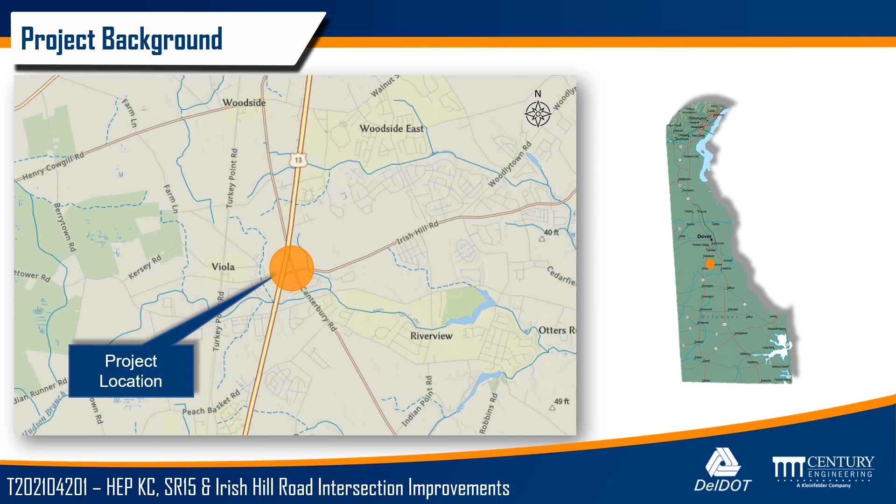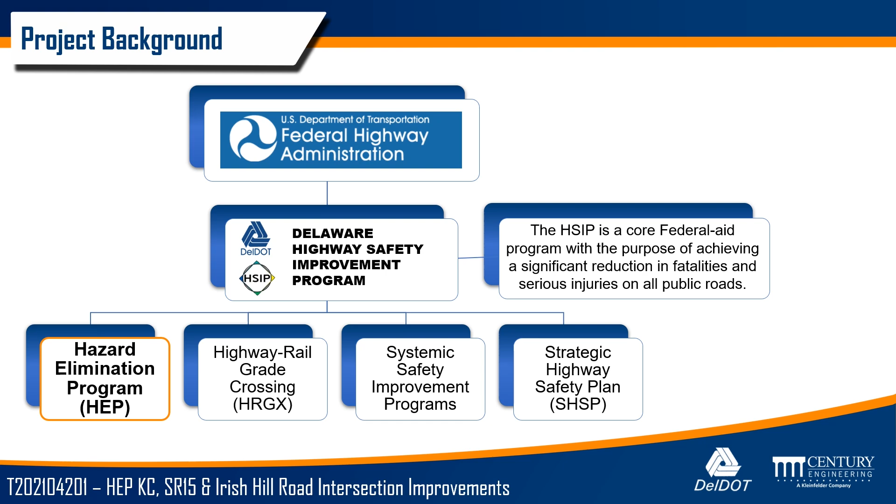This project is located near Felton and Viola, Delaware in central Kent County, specifically at Irish Hill Road and Canterbury Road. This is a federally funded project through the Hazard Elimination Program, or HEP. This program identifies both low-cost remedial improvements and long-term safety improvement needs for high crash locations throughout the state. This location was identified in both the 2010 and 2017 HEP studies. Lighting along US 13 was installed in 2012 as a result of the 2010 study, and the improvements shown today are a result of the 2017 study.

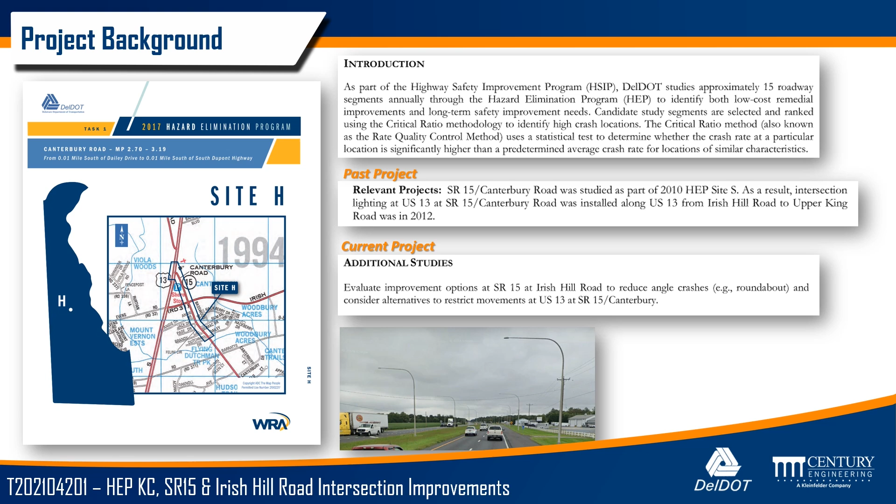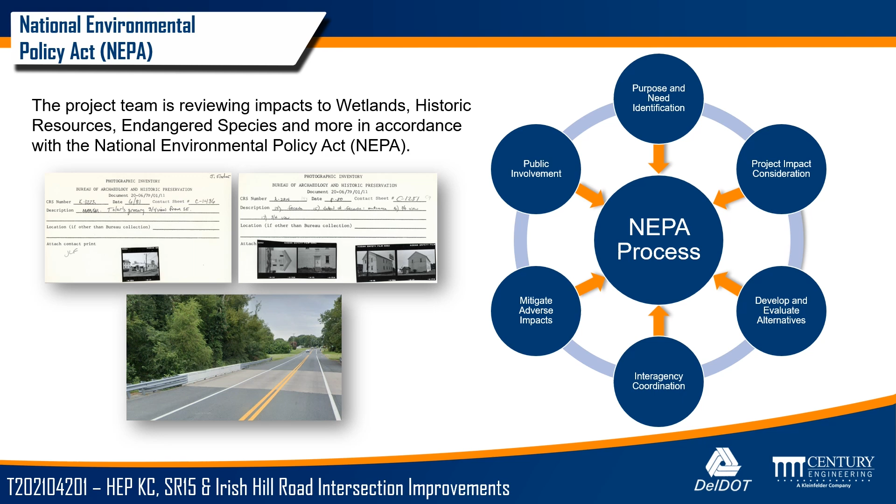This project is federally funded and will comply with the National Environmental Policy Act, or NEPA. The project team will investigate and minimize impacts to wetlands, historic resources, endangered species, and more as part of this compliance. The purpose of this project, as identified in the HEP study, is to reduce crashes at two locations, US 13 and Canterbury Road intersection and the Canterbury Road and Irish Hill Road intersection.

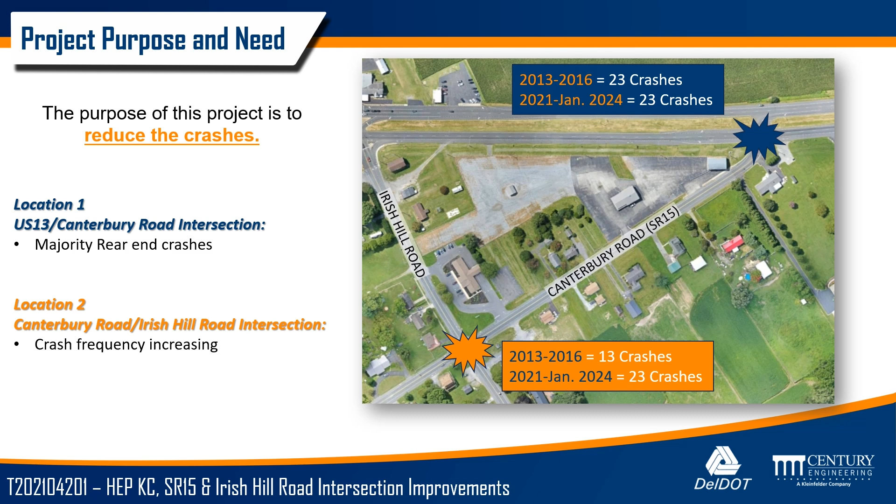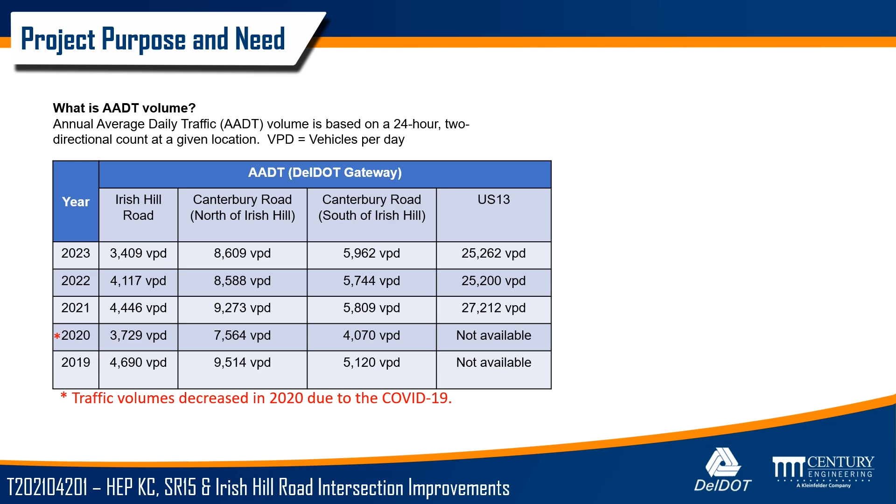As part of the design development, a traffic analysis was performed. The existing and projected traffic volumes were studied for each alternative shown. Shown here are the existing volume numbers for the project area. Before we discuss the alternatives, let's talk about roundabouts. You may have observed more and more of these intersection types being constructed throughout the state. This is because of their increased safety when traveling through the intersection, along with more efficient operation. More information on roundabouts can be found on DelDOT's website, and we encourage you to familiarize yourself with the material.

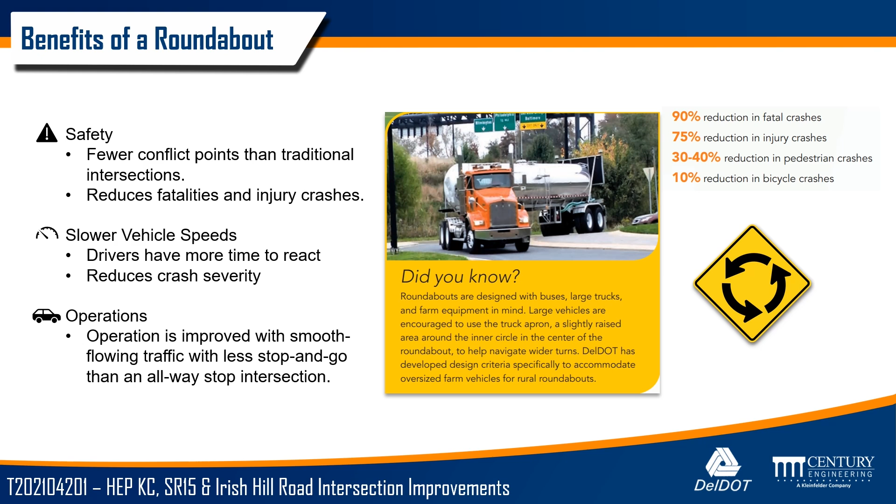The most common intersection type other than stop signs are traffic signals. Roundabouts have an advantage over both since they reduce the severity of crashes through a 75% reduction in conflict points. What are conflict points? Conflict points are spots at an intersection where vehicles can collide, causing damage or injury. A traditional intersection has a total of 32 conflict points, whereas a roundabout has 8. Of these 8 conflict points, none are considered to be severe. Roundabouts also provide a more cost-efficient design, help to maintain the flow of traffic, and typically reduce the need for right-of-way.

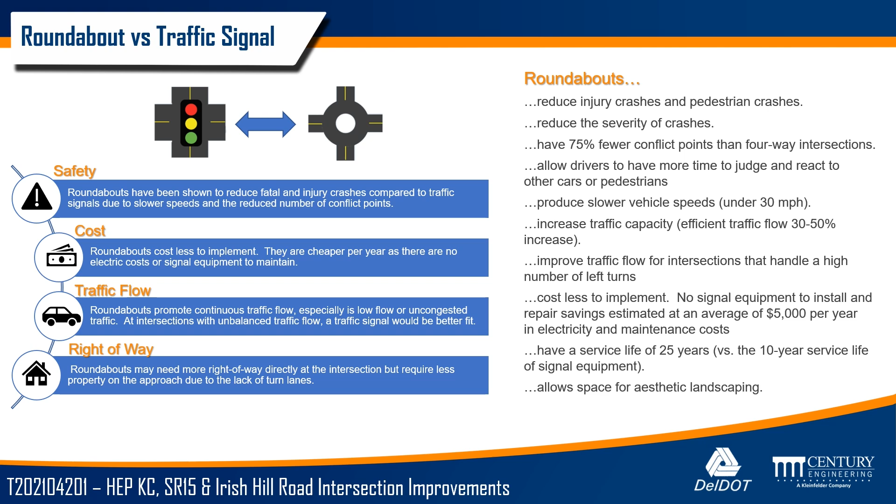As mentioned, DelDOT has a lot of great resources available for roundabout education. We encourage you to visit the site and share with your friends and family, especially new drivers.

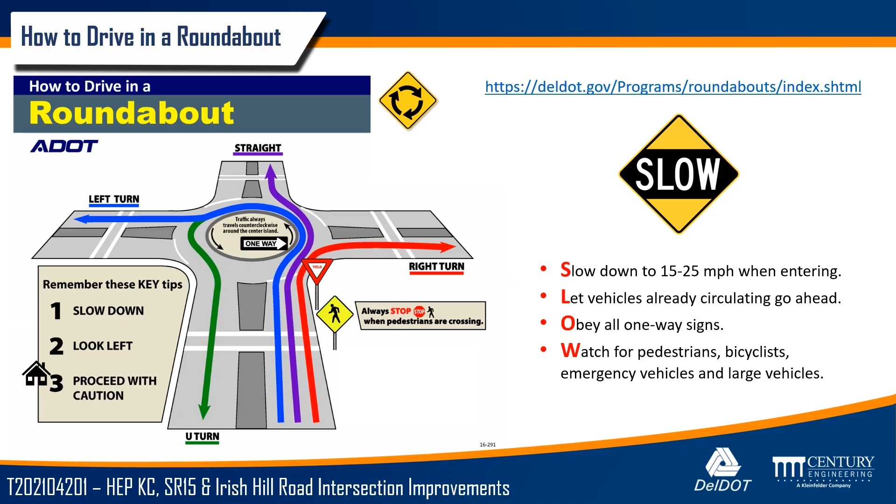Shown here is a rendering of what the roundabout may look like once construction is complete. As you can see, careful consideration was made to minimize impact to the surrounding residents while providing an optimized design.

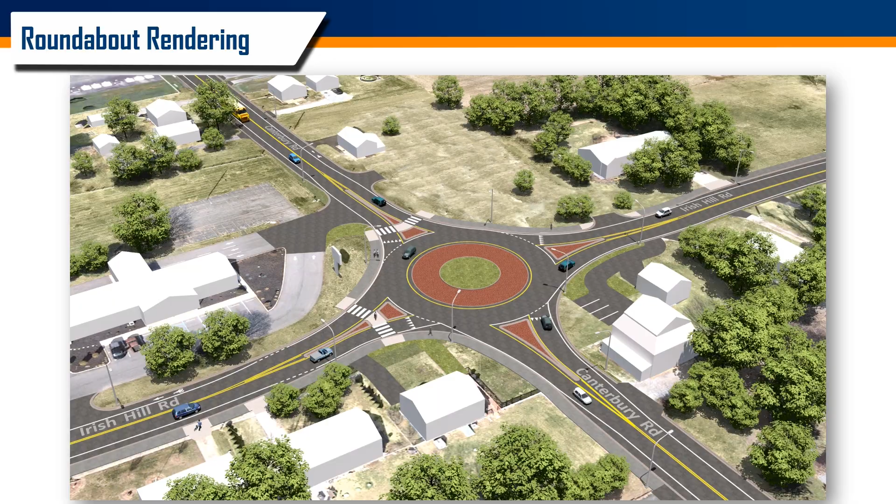Alternative 3 once again maintains the roundabout design discussed in Alternative 1, along with the realignment of the Canterbury Road approach to US 13. The main difference in this alternative is the closure of the crossover at US 13 and Canterbury Road. The closure of the crossover will significantly reduce the number of crashes identified in the HEP.

Traffic heading southbound on US 13 wanting to turn onto Canterbury Road or Irish Hill Road will need to continue to the signalized intersection at Irish Hill Road. Because of the increase in traffic, the left turn lane will be lengthened and the traffic signal will be adjusted accordingly.

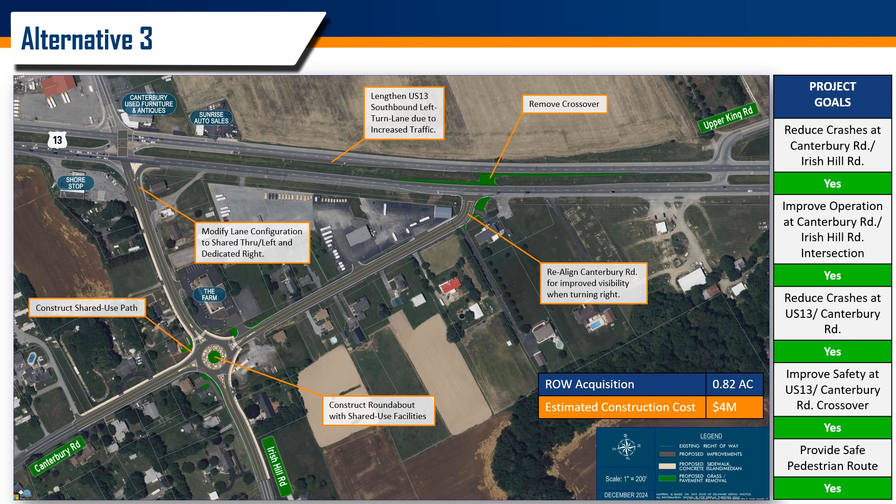While analyzing the projected traffic model, it was observed that between 2028 to 2029, the northbound left turn lane at US 13 and Upper King Road is expected to reach full capacity, potentially causing congestion and safety concerns. Although these improvements at this intersection are not a part of the original scope, we are presenting two options for mitigation to address these anticipated issues.

The first is to lengthen the northbound US 13 left turn lane to prevent vehicles from spilling into the travel lane. The second option is to construct a partial traffic signal at this intersection. This signal would stop the southbound US 13 traffic only, allowing the northbound US 13 left turning traffic to safely turn onto Upper King Road.

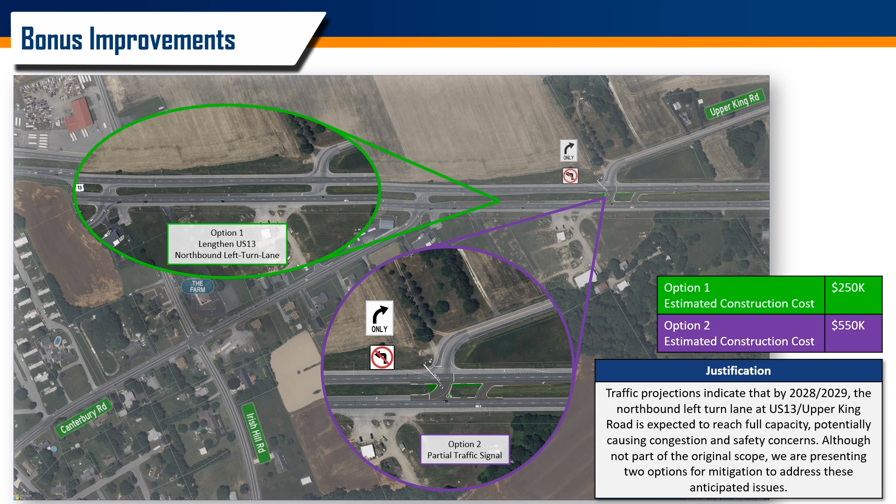Our project schedule as it stands today has us in the early stage with this alternatives public workshop. The next step will be to select the preferred alternative and proceed with the design. There will be a second public workshop held in summer of 2025 to present and discuss the selected alternative. Then the right-of-way acquisition process along with final design will begin in 2026, and lastly construction beginning in 2027.